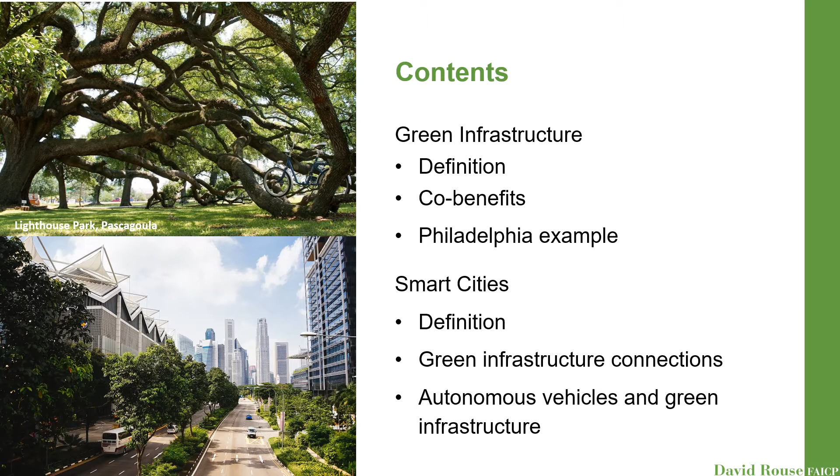Live oaks are a form of green infrastructure, and the recovery from the damage caused by Katrina is a sign both of their resilience and of the importance of nature for sustainable cities, something to remember in this time of advanced technology. So let me start with green infrastructure.

There are two definitions of green infrastructure in common usage. The first, older definition, refers to a network of open spaces such as parks, greenways, and natural areas at the scale of a city or a metropolitan region. This definition actually dates back to Florida, the Florida Greenways Commission, which was the first to use the term in the 1990s.

The second, more recent definition refers to stormwater management practices that use vegetation, soil, and permeable surfaces to absorb runoff close to where it's generated. This definition has been advanced by EPA in particular.

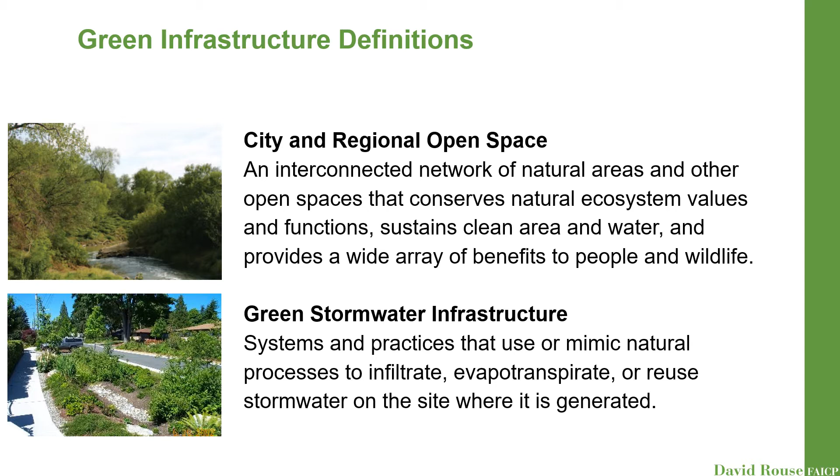In reality, there's no sharp differentiation between these two definitions. In my mind, they form a continuum across scales, geographic scales from the region to the city, district, neighborhood, and site. So this slide shows a few examples of green infrastructure at the regional and city scale. For example, farmland in Lancaster County, Pennsylvania in the upper right.

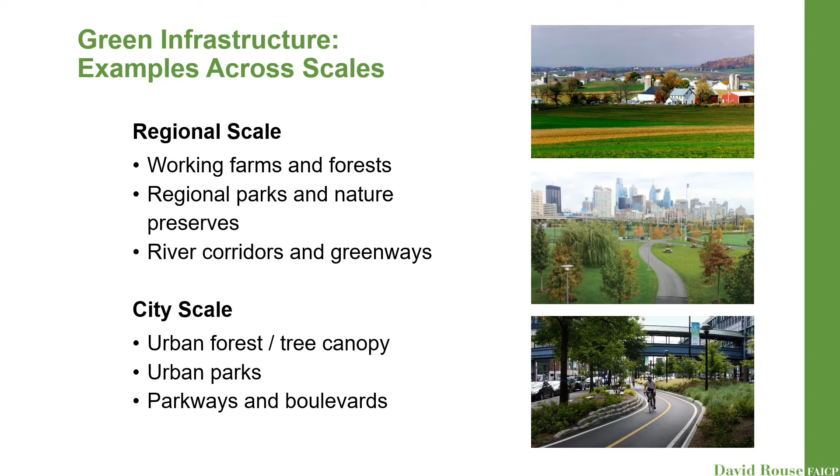And this next slide shows examples at the neighborhood, site, and building scale. For example, in the lower right, you see a pollinator-friendly green roof installation, and this is closer to the definition advanced by the Environmental Protection Agency.

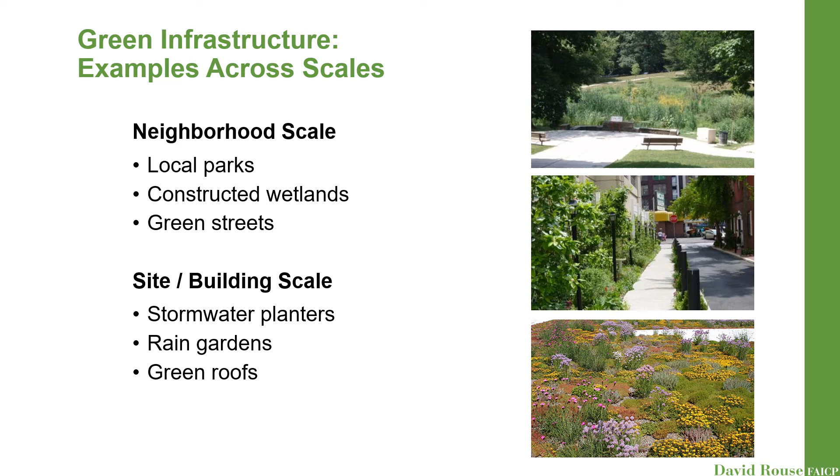Regardless of scale, green infrastructure provides multiple benefits for people and ecosystems, which are often referred to as co-benefits. These co-benefits can be organized around the triple bottom line of sustainability: environmental, economic, and social. The social benefits are particularly evident in the realm of public health, which has certainly risen to the forefront during the current pandemic.

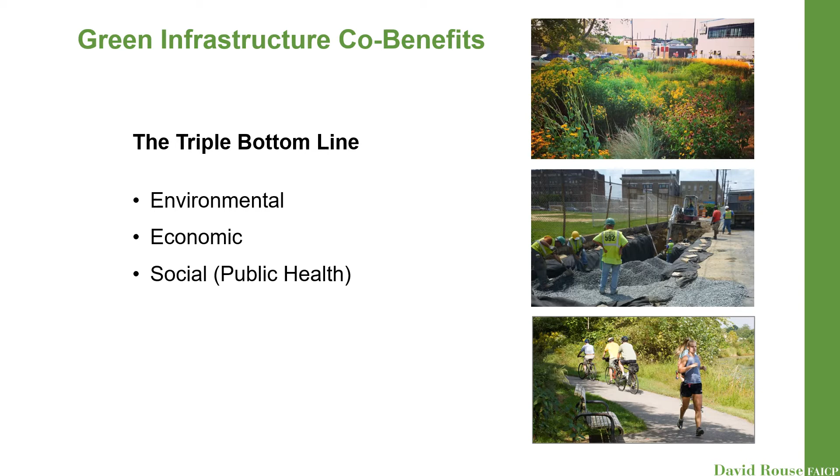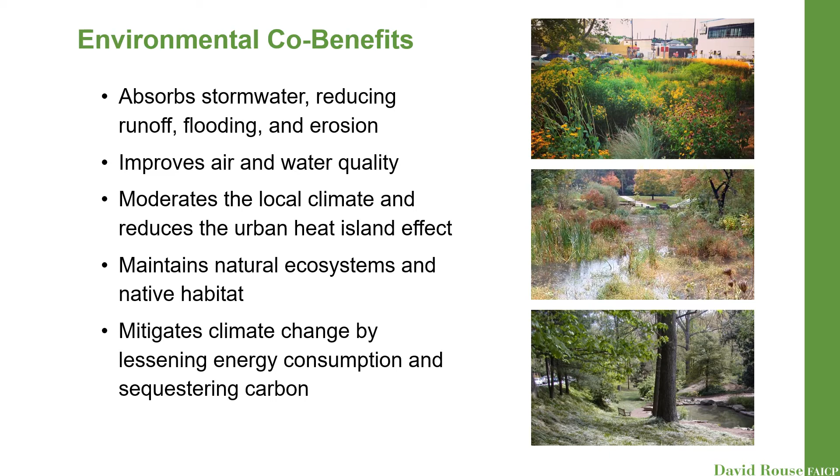So let me go through these three categories of co-benefits one at a time, starting with environmental. Green infrastructure is probably best known, as I've touched on, for its role in stormwater management. It also improves air and water quality, reduces the urban heat island effect, and plays a role in mitigating climate change by reducing energy consumption and sequestering carbon.

Green infrastructure also provides benefits for the local economy. It creates business and job opportunities, stimulates retail sales. There was a study done that showed that businesses along tree-lined streets had higher revenues than along streets without trees. It increases property values, attracts visitors, and puts money back into the economy by reducing costs from things such as energy, healthcare, and engineered infrastructure.

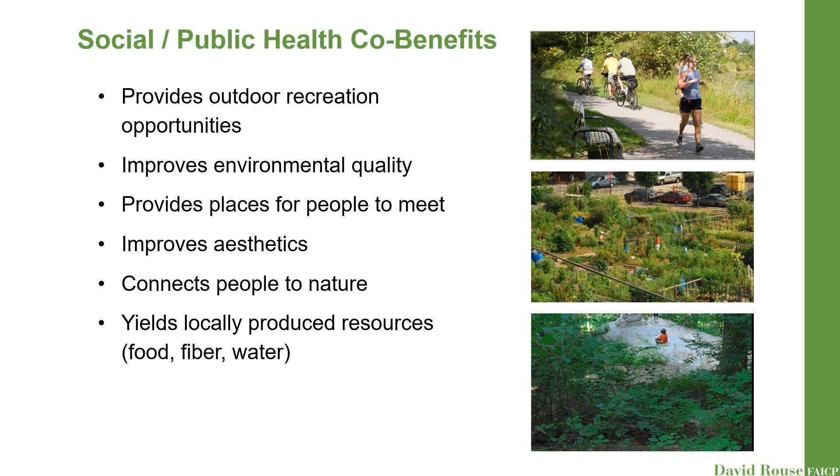Moving on to the social and public health co-benefits of green infrastructure, some examples include providing outdoor recreation opportunities, improving environmental quality and aesthetics, and also connecting people to nature. There's a growing body of research on the benefits of green infrastructure and nature in general for mental and physical health. And the image you see in the bottom right is of forest bathing for health, a practice that originated in Japan and is increasing in popularity in this country.

However, it's important to underscore that the co-benefits provided by green infrastructure are not shared equally by all racial, ethnic, and income groups. In fact, research has consistently shown that poor and minority neighborhoods have worse health outcomes and less access to parks, tree canopy, and other forms of green infrastructure.

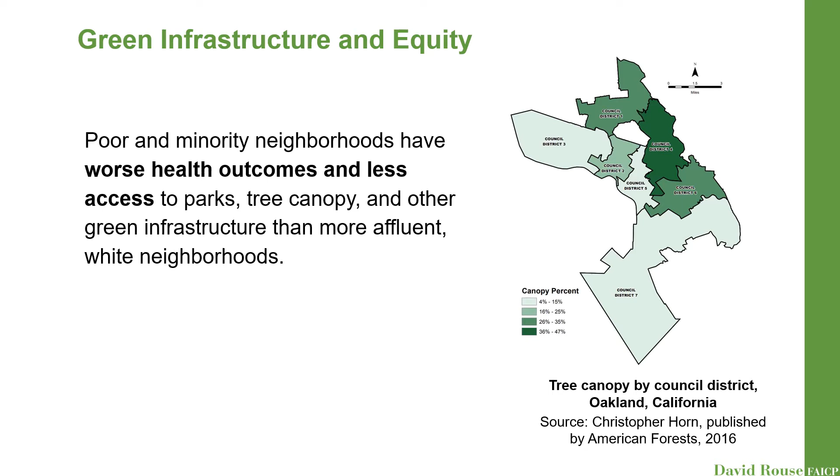I'll now move on to Philadelphia as a case study for the application of green infrastructure. In Philadelphia, green infrastructure has two meanings that mirror the two definitions I shared earlier. The first is citywide open space and green resources such as parks and the urban tree canopy. And the second is green stormwater infrastructure at the site and neighborhood scales. Together, these make up a network that connects individual building parcels and sites, streets, neighborhoods, and districts to the city as a whole.

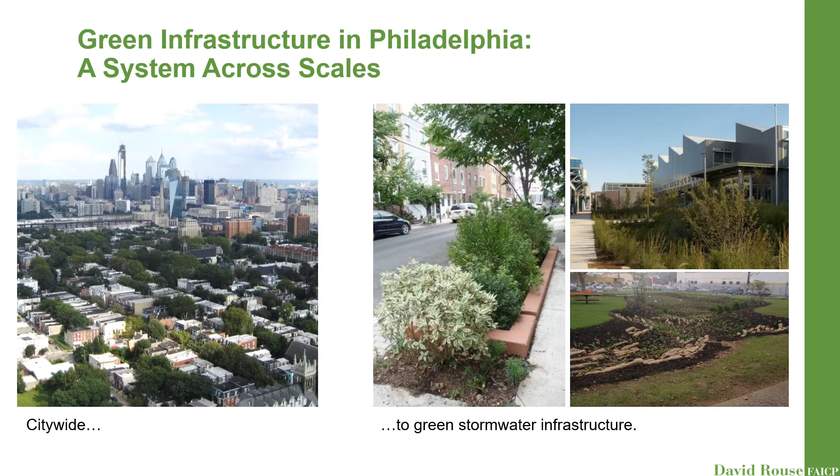The regulatory driver for Philadelphia's green infrastructure program was the Clean Water Act and the need to address sewer overflow into the Delaware and Schuylkill rivers during heavy rain events. To solve this problem, the city reached an agreement with EPA to invest $1.7 billion in green stormwater infrastructure over a 20-year period as an alternative to a gray infrastructure approach, which typically would be the installation of large underground storage tunnels. And in doing so, the city did a study of the co-benefits provided by green infrastructure. And the study found over the 20-year period an over $2 return on every $1 invested.

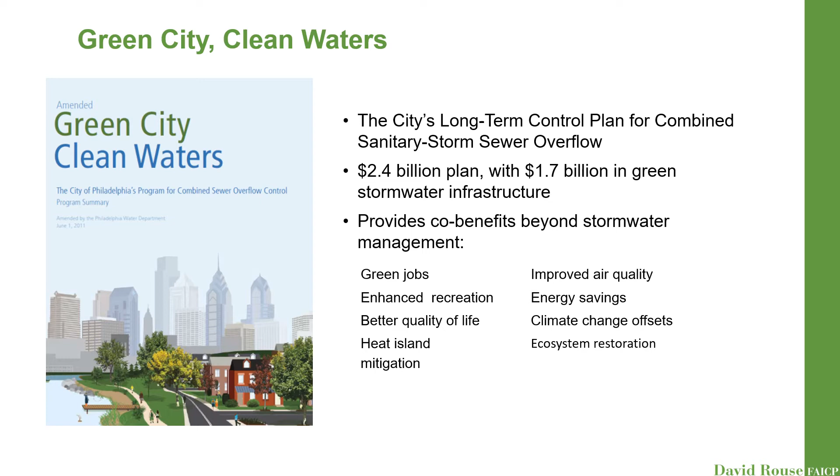Philadelphia's green infrastructure program, called Green City Clean Waters, dates back about 10 years and is led by the Philadelphia Water Department. Here's a palette of stormwater management tools that the Water Department and its partners are installing across the city. I won't get into the details, but for me, the key takeaway is how these tools integrate natural systems and processes into the built environment through both plantings and structural methods of retaining and slowing runoff.

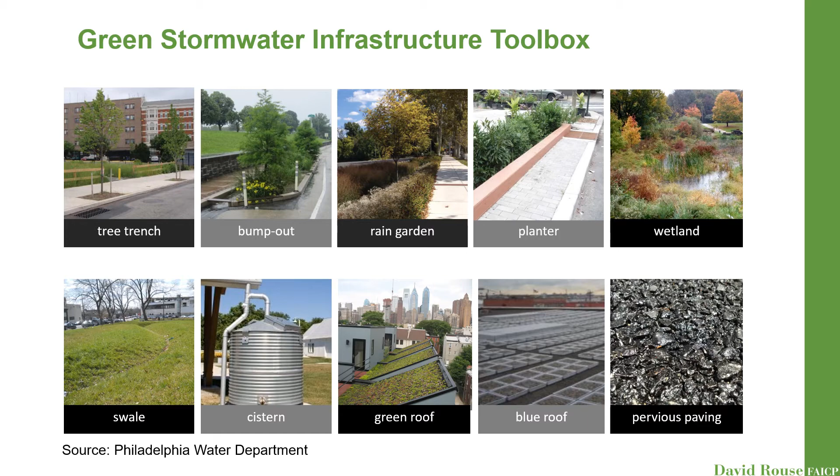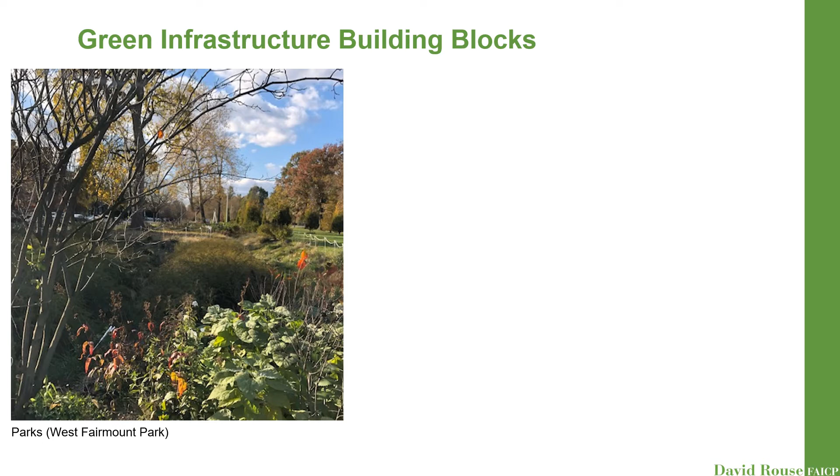Moving up in scale, here are some larger components of Philadelphia's green infrastructure system. First are parks. This is a green stormwater installation, a rain garden and detention area in West Fairmount Park. Next are green schoolyards. Since 2012, the city has been partnering with the Trust for Public Land to transform asphalt paving into green parks and play areas, as shown by this local elementary school.

And then next are green streets. I showed you earlier an image of a neighborhood green street. This is a view of street trees along the Benjamin Franklin Parkway, Philadelphia's grandest boulevard that terminates at the steps of the Art Museum. Speaking of trees, I would add tree canopy, the largest structural component of green infrastructure in cities, to this list of building blocks, and I'll come back to that a little later.

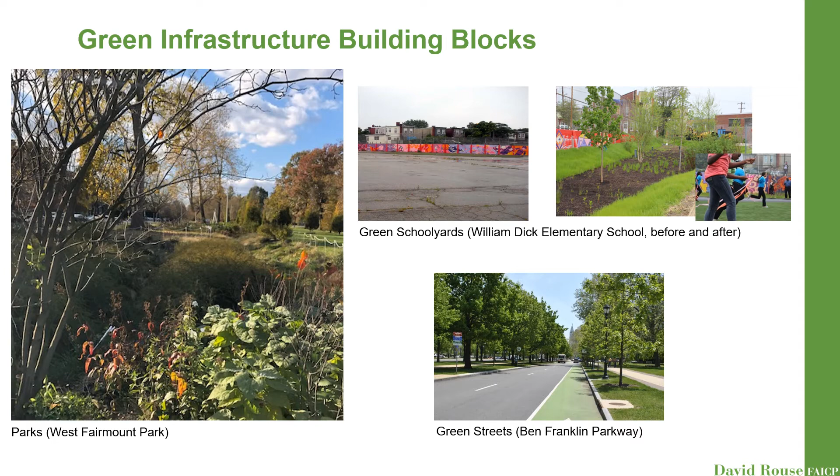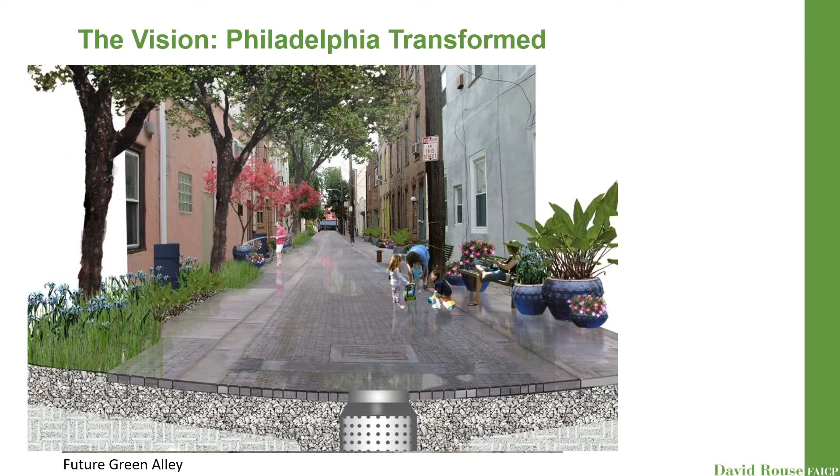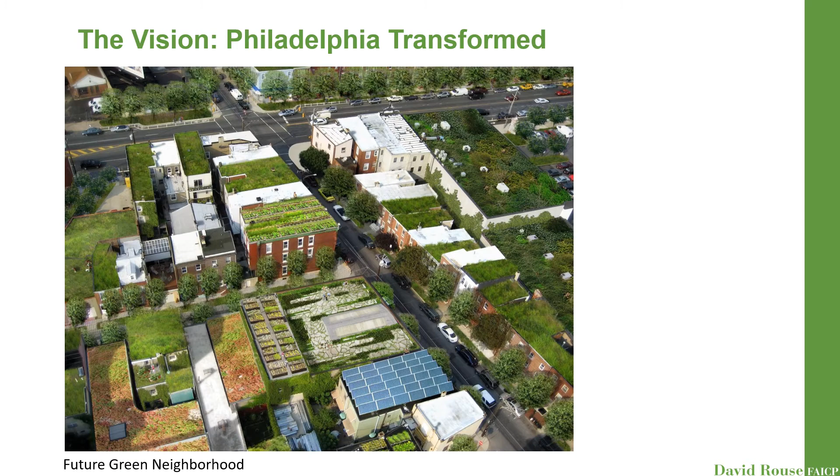And finally, this is an existing view across Philadelphia looking towards the Delaware River. And here's an illustrative rendering of the same view transformed into what the original founder of Philadelphia, William Penn, termed a green country town.

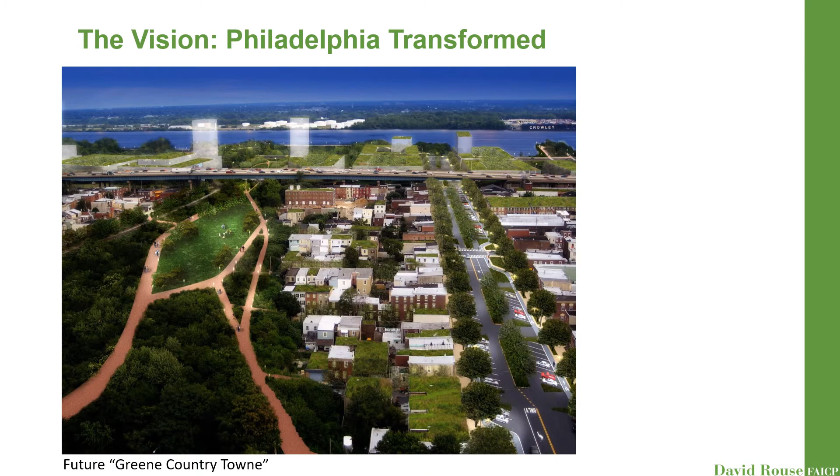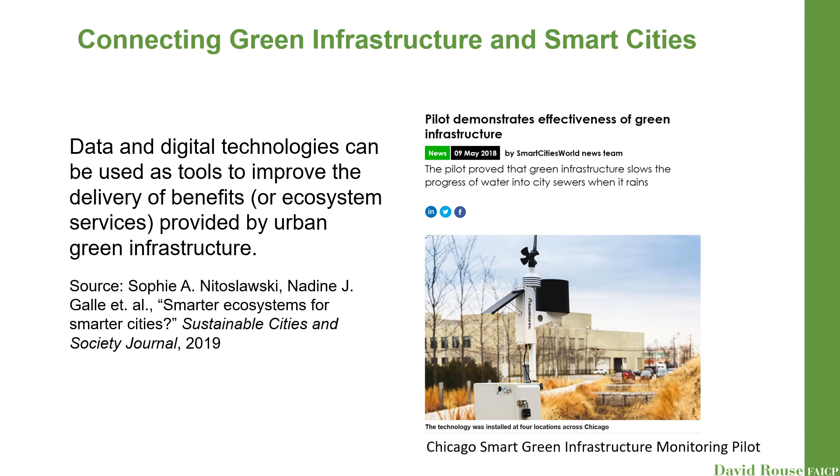This project measured the performance of stormwater management strategies such as permeable pavement, bioswales and rain gardens under different weather conditions. The project was the first to measure the performance of green infrastructure using sensors and cloud-based analytics, and the results demonstrated the effectiveness of green infrastructure as an approach.

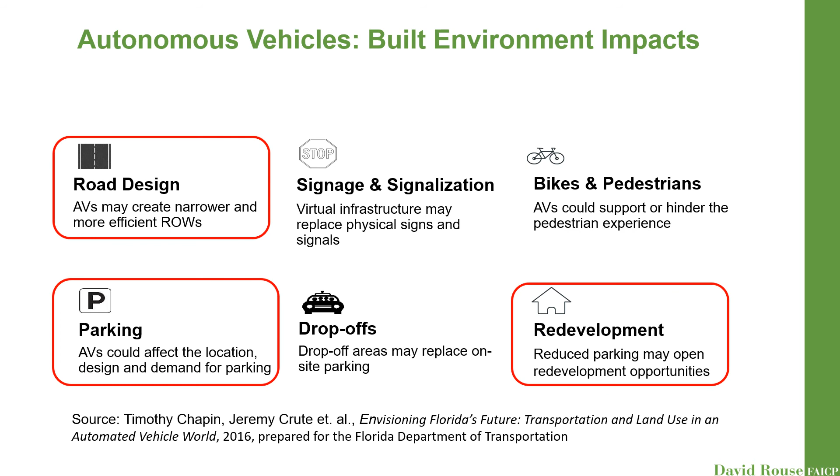Focusing in on impacts of AVs on the built environment, a team of researchers from Florida State University identified 6 potential impacts, of which I find 3 to be particularly relevant to green infrastructure. First, AVs may create narrower and more efficient rights-of-way. Second, AVs could affect the location, design, and demand for parking, shifting it from central districts to more peripheral locations, reducing the size of parking garages and parking spaces, and potentially dramatically reducing demand. And third, reduced parking may open up redevelopment opportunities, particularly combined with a trend being accelerated by the pandemic, the replacement of bricks and mortar retail stores by e-commerce.

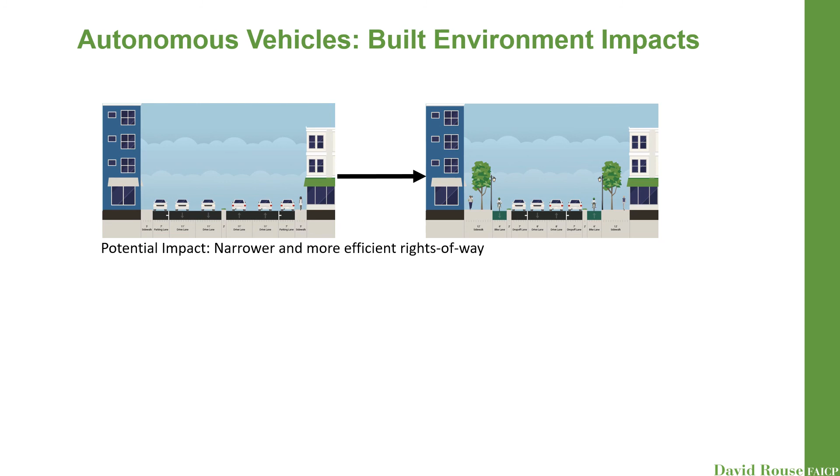The FSU team developed illustrative graphics that show potential connections to green infrastructure. So, for example, narrower rights-of-way would free up space for street trees, sidewalks, and green stormwater infrastructure, promoting green streets. Reduced parking demand would open up not only redevelopment opportunities, but also opportunities to deploy different types of green infrastructure to achieve the co-benefits I talked about earlier in the presentation.

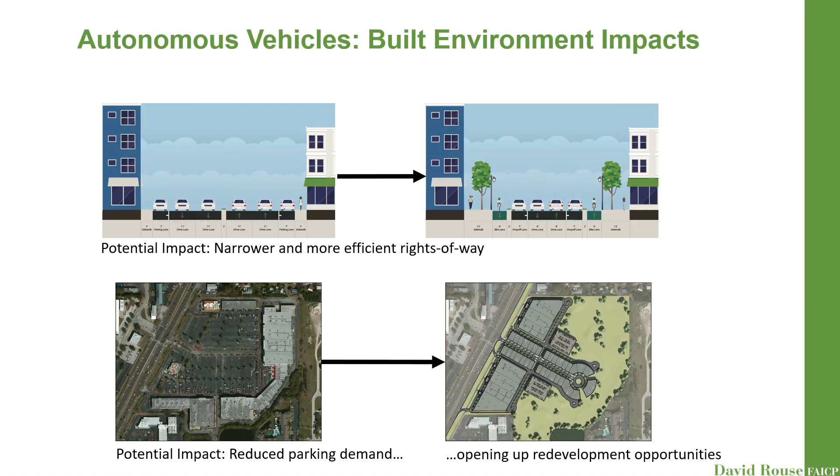Now, there's been a lot of debate about what AVs will ultimately mean for the future of cities. At one extreme is the utopian view, a vision of an AV world with shared vehicles, fewer cars, reduced congestion, cleaner air, and better land use. At the other extreme is a dystopian vision of privately owned rather than shared vehicles, zero occupancy cars roaming the streets, more traffic, pollution, and sprawl. Undoubtedly, the ultimate outcome will be somewhere in between these two extremes.

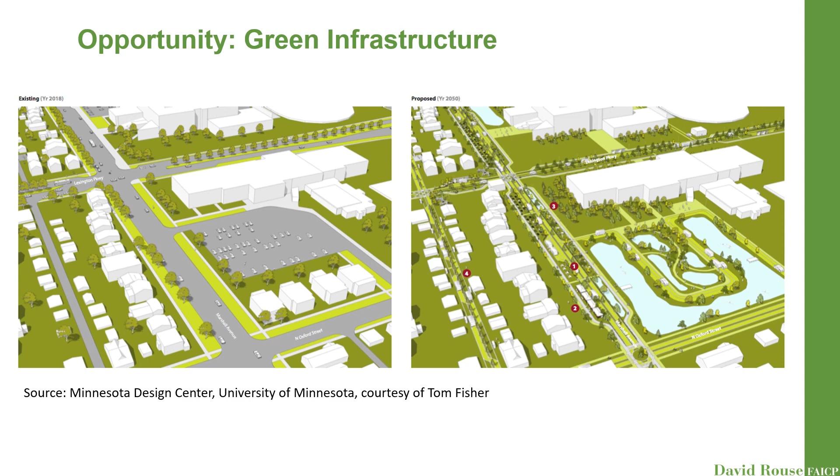But I do think that planning, design, and policy change can scale up the use of green infrastructure to benefit people and communities. This before and after visualization from the Minnesota Design Center illustrates the opportunity AVs, a form of smart city technology, could provide to rethink the design of the built environment.